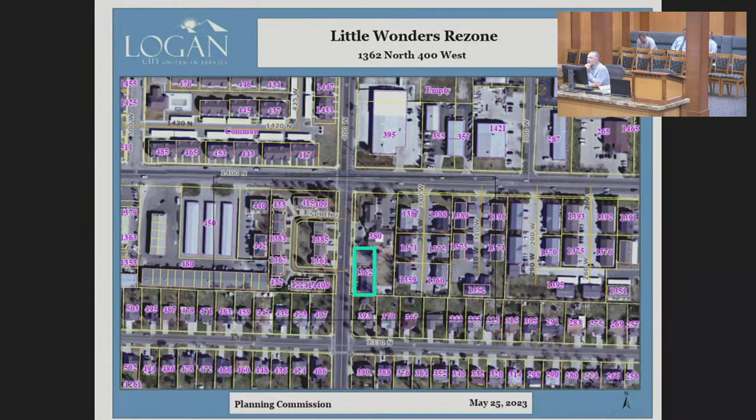And the current zone is residential. As you can see here, it's MR12. Commercial level daycares are not allowed in that residential zone - they're capped at 16 maximum kids, and they would like to house about 30 to 35, I believe. So their request is to rezone that to community commercial, which is the blue color here, to match the zoning of their main building and main campus there.

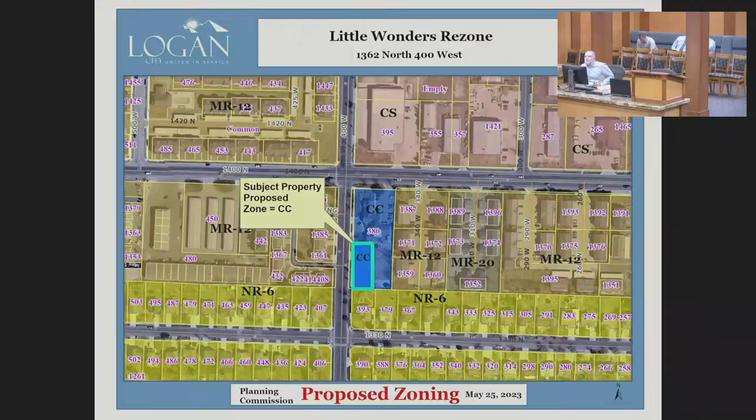Any questions on this one? No. Okay, this is a public hearing. If anyone present would like to come and speak to ordinance 23-19, please come to the microphone, identify yourself, and please limit your comments to 3 minutes.

I will bring it back to the council for action. Before we do that, one quick question: was there any community communication, any emails or anything that came to planning on this? No public comments on this one.

I'll move approval of ordinance 2319. I will second that. Any further discussion? Seeing none, all those in favor of ordinance 23-19 indicate aye. Aye. Aye. Any opposed? Okay, ordinance 23-19 is approved. Thanks, Russ, we'll see you in a little bit.

Okay, we will now move to a public hearing on resolution 23-23. This is a consideration of a proposed resolution establishing a property line adjustment fee schedule. We workshopped this pretty extensively at our last meeting. So, Darren, if you have any information you'd like to share with us or the room before we open it to the public hearing?

The only additional information: I provided the summary of how we calculated the fees. That was provided to council for review. Otherwise, it remains the same. Open to any questions. Any questions from either of you for Darren on this? Thank you for doing that analysis.

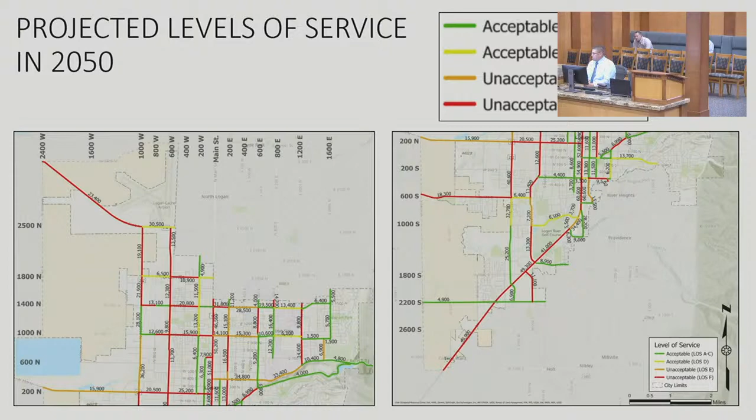We do that through a couple of different processes: having different types of roadways, our classification of roadways, and having different levels of service, identifying our target level of service, which is a D. I've provided a list of comments that were made to the council, as well as one made to the Planning Commission. Through that process, we addressed those comments, at least to what we feel addresses them, and we'd like to leave that up to you to decide whether we addressed them sufficiently or not.

And I guess with that, unless there's more information you'd like to bring forth, I'll leave it up to the council to have that discussion. Any conversation prior to opening the public hearing? Well, I do know that we got an extensive email just before this meeting with some questions and concerns. So let's have the public hearing and then we can talk about it.

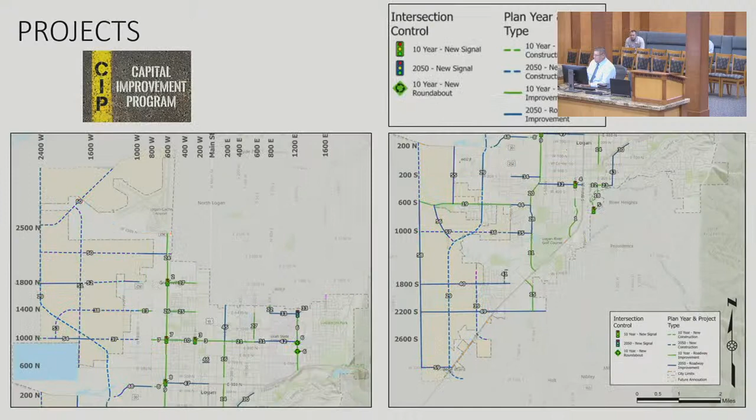I had an extensive conversation with Darren this afternoon and he answered a number of my questions, but I'll make two of them now. The 400 North from 1st West to 6th West is designated in the plan as a future collector street, I think? Yes. Or, it's not an arterial? You're correct, it's a collector street.

That neighborhood has been under threat for quite a number of years with engineering studies. The neighbors there are aware of this, and they're very, very concerned because we have an arterial at 2nd North, and we have Ellis School there. So I think we need to be very careful that we don't dissect this neighborhood any further. I've made pledges to them that I would try to defend them. I think we need to find other ways than to cut another arterial through a good neighborhood. So that's one thing, and I think that needs to go on record.

The other comment came up not too long ago, about the roundabout on 5th North and 2nd East. I love roundabouts and lived with them as I've traveled and lived in foreign countries, but that roundabout doesn't work very well. It backs up, and I don't know the engineering behind it. I think there's an overload on the north-south direction and not so much on the east.

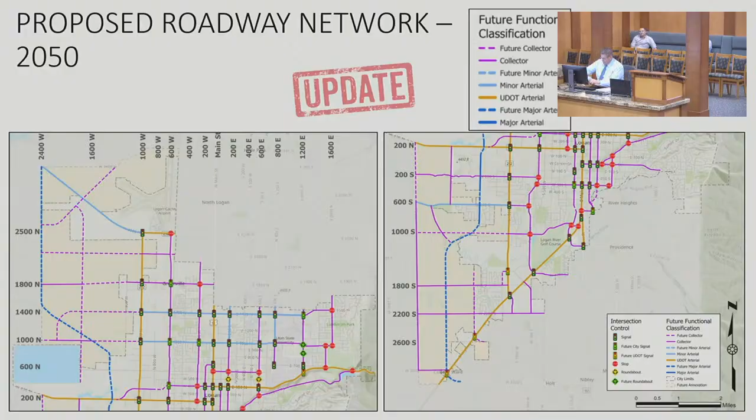Dr. Gail Yost. I live on First East, and I'm part of the Neighborhood Council, Neighborhood Steering Committee. I have two questions. One is about First East. We are getting inundated, and yet just one block north of where I live, we have another building being finished that has 100 and something apartments in it.

And how are we going to, is this going to really be approved? I mean, the problem is, I see your landscape thing saying approved, or it's okay, but it's unacceptable, or it's acceptable. But I don't see how we can handle any more traffic than what we already have.

We only have one lane each way, other than at the traffic light at Third South. And it gets backed up to where we can almost not get out of our driveway almost every time that we need to leave. And this is not just the peak times.

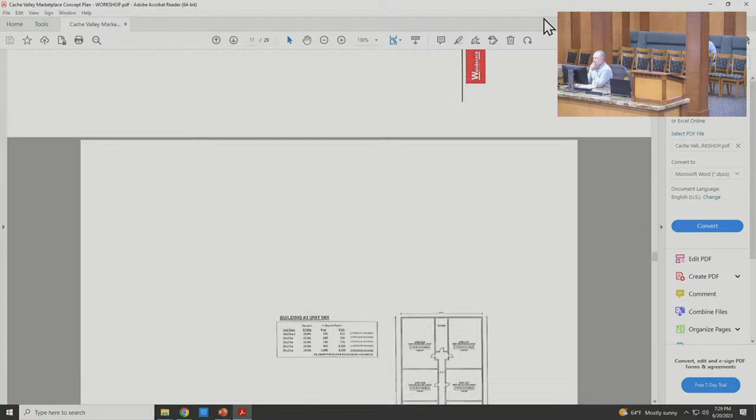But let me... Can I ask a question then? Yes. So then as far as public comment and public ability to render their thoughts and opinions at this concept plan stage, that is not included. It's only when it comes back to planning, when there's an actual action item on it. So there's not, at least the way I understand it, there's not a formal public comment period when it's workshopped as a concept plan.

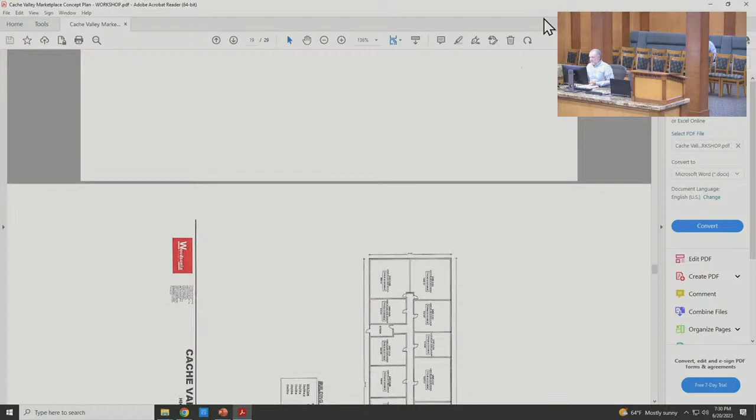That could be, I mean, maybe changed in the future, or maybe there's other ways to receive comment. But once it goes to Planning Commission to start the actual formal project application, then obviously there's comment periods available at that time. See, I do have a question about that.

Because I know that we're workshopping it, so that's why. But if you are creating a concept in partnership with the Planning Commission and the staff to create, quote unquote, a better product in a space that doesn't accommodate it easily with zoning, it doesn't seem prudent for us to not have some way for the public to interact with that process.

Because right now, the Planning Commission can't talk about the project outside of Planning Commission because of their quasi-judicial role. The planning staff is talking about it internally, they present it with the developer. Then everybody hears it all at once, and the Planning Commission and you have had an opportunity to weigh in, but then you have given them the go-ahead for a project plan, and then the public gets to comment.

That seems like it's a little bit not in a good order, because we always tell the public to be a part of the beginning, not when it's built next to you. And we're saying if we're doing this, we're not allowing them to be a part at the beginning. So that's my comment. Yeah, and it is interesting because if they were just going for a regular commercial project, if it fit the zone, then there would be no need for the public input except for at the Planning Commission level.

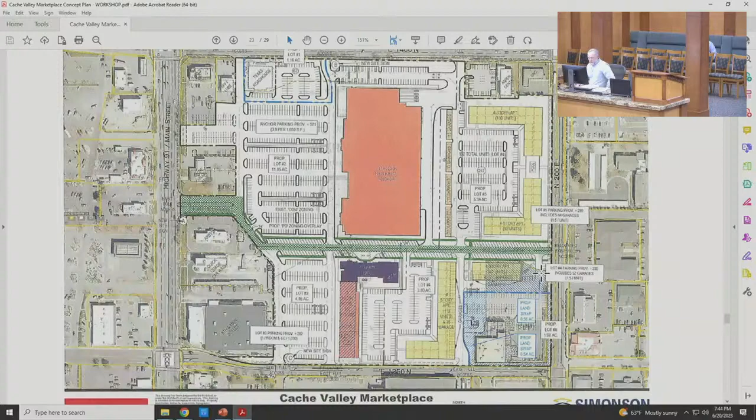Let me go through these. This shows some of the landscaping from a different angle. Sorry, that's a different orientation, it's rotated—north is on the right. I'll just turn my head this way.

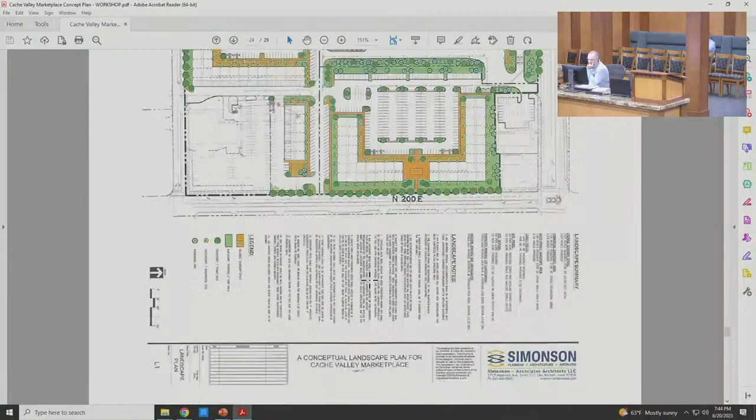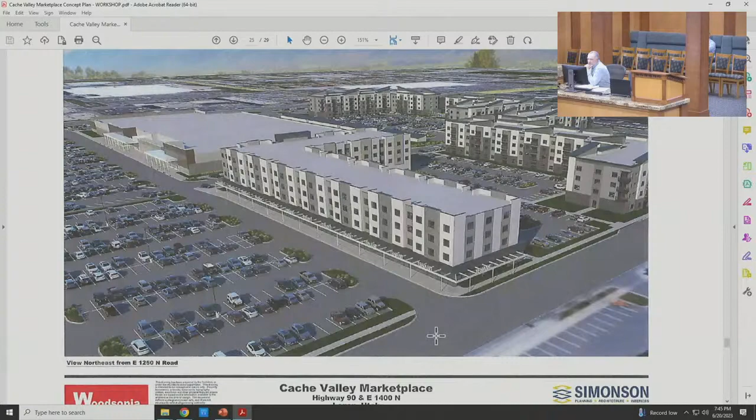The street in the foreground here is 1200 North Street. 1250—can you scroll back to that?

That commercial area with the awning—so if that was a coffee shop, could they have patio seating there? Is it wide enough for little tables and chairs, like if a Dunkin' Donuts wanted a couple outside tables? I think that's the intent of this concept plan. There's some flexibility there. I don't know if it's been detailed, but there's a wide sidewalk that could have some furnishings or other types of things.

This walkway would connect in front of here too. Some of the pedestrian circulation needs to be worked on a little bit—maybe some crosswalks right here. But yeah, that's the idea, that's more storefront.

Do those storefronts go all the way through the building, or are there also storefronts on the east side? It would be one tenant—this would be the front, and that would be the back. On the back side there may be a loading door, receiving. It could be restaurants, retail, things of that nature in this area.

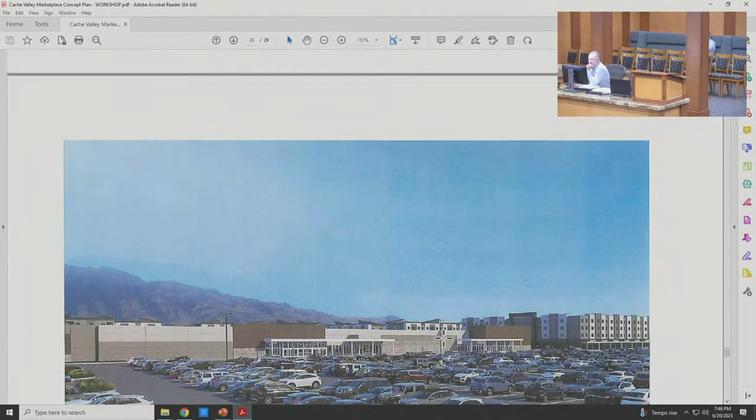This is looking straight on to the big box. By the way, Kurt just gave me this—the mall is about 300,000 square feet right now. This would be... 150 for the big box plus an additional 20, so you're about 170, compared to 300 for the mall.

This is looking basically straight east at the front of the big box here. The hotel's over here—you can see the lobby entrance to the hotel. And in the background you see those apartment buildings.

So from a taxable standpoint, the hotel is a commercial business, and you'd be receiving tax revenue from that, not too dissimilar from a store, correct? It's a bit different—the hotel does generate tax revenue, property tax as well as room tax, whereas residential is reduced by 45%.

Is the hotel square footage included in the commercial square footage? No—that 20,000 square feet is just the bottom first floor storefronts. So you've probably got 20,000 times 4 at least for the hotel floors above. In terms of square footage, commercial space—you'd multiply the 20,000 by 4, so you've got 80,000, plus the 150,000, so you're close to the square footage of the mall overall.

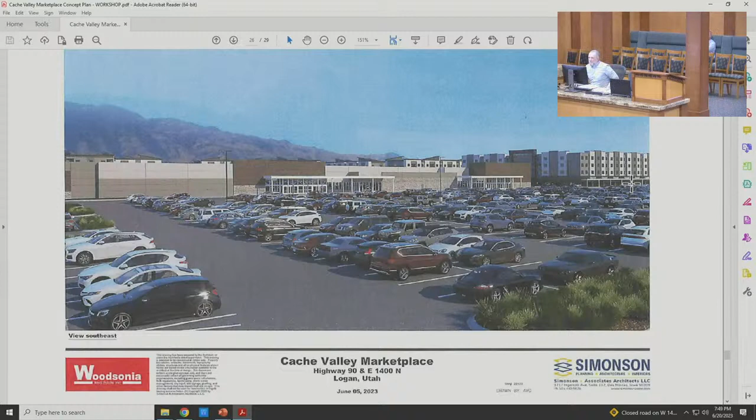Correct, yes. I'm just wondering if my thinking is off—everybody's staring at me kind of blankly. I'm thinking it's really more commercial space than the 170. There are 156 rooms. I'm not sure what an average room size would be, but they're about 400 square feet this way, and then this way, so it's even a little bit more.

Just some more images here, to give you an idea of scale and mass.

Top left is again from above Home Depot. This is looking directly off of 2nd East, so they have a pool here. It's hard to see, but this would be the back of the big box right behind there. This shows the front of the hotel a little bit better. So this is that kind of interior street as well.

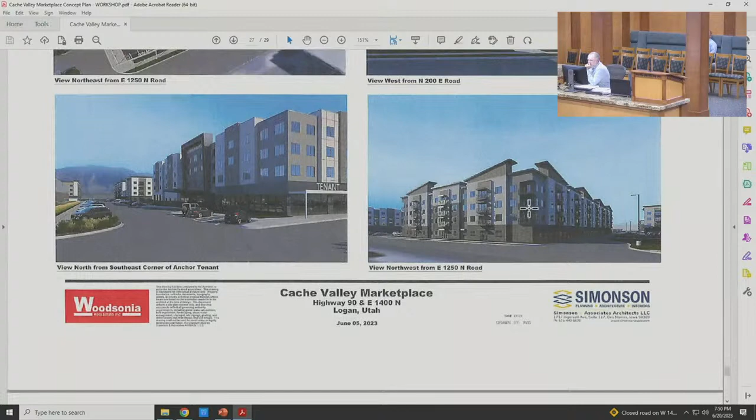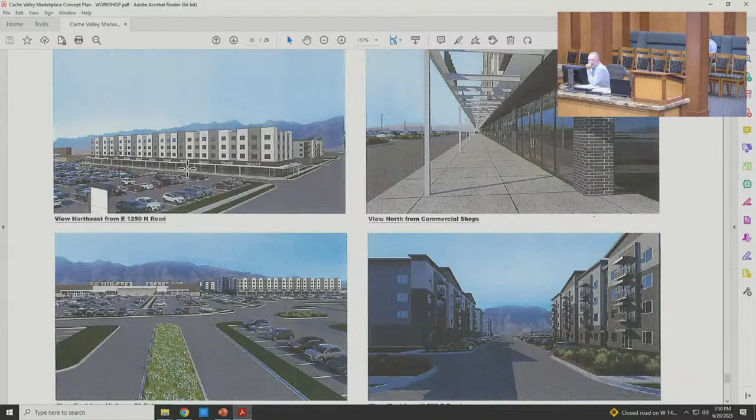Again, not a ton of detail at this point, just kind of give you some ideas. And then this shows the residential, kind of a unique parapet design there. This shows those storefronts a little bit better, so you get an idea. Probably 12 to 15 feet of sidewalk width there, with the canopy overhead. This shows it from a little more straight on.

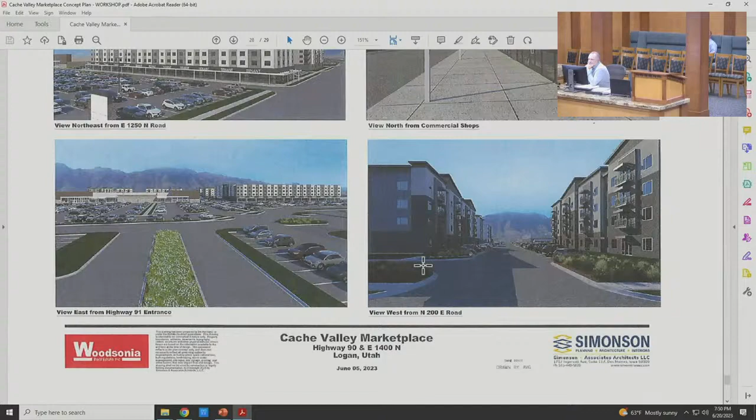This one would be looking at the existing mall entrance, looking directly into the project from Main Street. More of the residential.

This is a proposed sign amendment. Let me go over the changes that they would like to request, and it's part of this exhibit that was in the packet.

For starters, they would like a parking lot interior landscaping variance that doesn't require the 36 square feet of interior landscaping when you have parking lots that exceed the base requirement of 125%. The idea around that code is the bigger the parking lot gets, the more landscaping we feel like it needs to offset the visual impacts of that amount of asphalt, but also the environmental impacts. Shade trees and things like that are good.

They're requesting that it just stay the standard 18 square feet, which is typical for most projects that you see built recently. This is a standard that was adopted about 7 or 8 years ago, so newer projects will have that parking lot landscaping. And it doesn't have to be islands right in the middle.

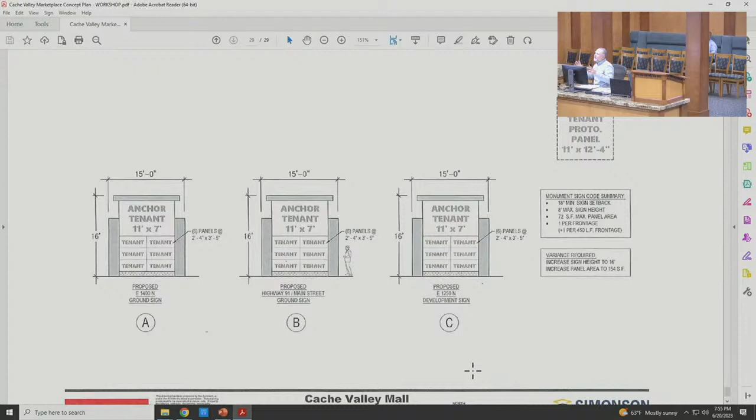Well, the way the code reads is you get 1 sign per street, plus 1 extra sign for every 450. Since they actually have 4 streets, they would be given 4 signs, plus they have frontage. So the project would allow up to, I think by right today, more than 6 signs, but at a smaller size. Yeah, it's not the quantity that's the issue, it's the size that they're requesting.

So they're requesting 3 instead of 6, but bigger signs than what they would be allowed under our current code, is what I'm hearing. Well, actually, let me go back, because I think it's 4, and I apologize, I should know that. But let's see, so it's 1, 2, 3.

Oh, you're right, 3. Well, I will say, having been behind people where they don't see a sign until it's right on top of them and they slam their brakes on because they're like, oh crap, that's where I wanted to turn - sometimes signage is not necessarily a bad thing on a busy road. Yes, for wayfinding purposes, I totally agree.

The other one is density, and this one really depends on how it's entitled, because if you look at it as an overall project and the 28 acres, it's well under the mixed use density of 20, or even commercial's 30. If it's entitled and permitted totally separately, where they're saying okay, we're going to carve off the back and permit that totally separately, then it would need the density increase.

To what? They're asking for 50 units per acre. But if you do the calculation of the overall, I think it was about 12 units per acre. So it's MR50 if you just look at the housing footprint of where it is, but it's spread out, it's MR12.

Yeah, but we'll typically do gross density when we do projects like this. We've got a mixed-use project going before the Planning Commission Thursday, and that's going to be a gross density, even though they've got portions. So it's how it's reviewed and permitted.

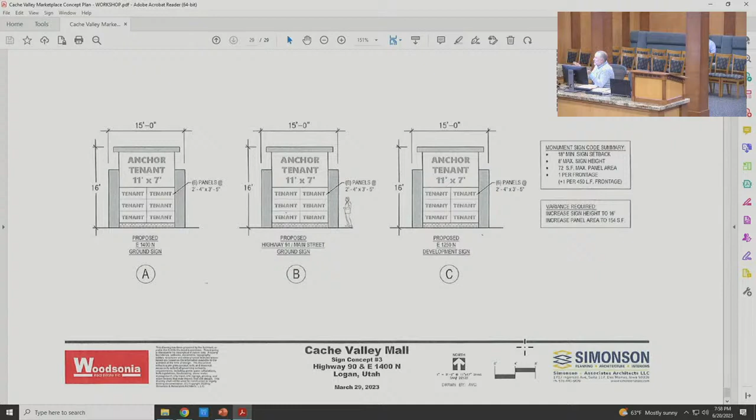So I think that asking for that clustering is unusual, but I don't think it's a big deal. The only fear, I guess, is if the big box came in separately, was permitted totally separately, and then the back part was sold and came in 2 years later totally separate. Then it would be a density issue, but I don't think that's the case. This is going to be one project review and approval.

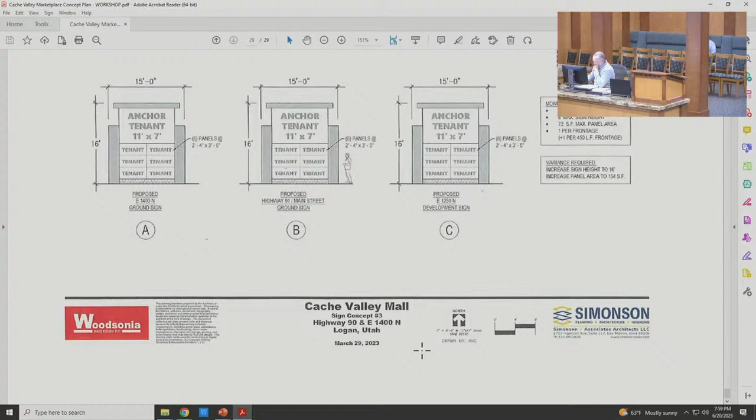But that's the only comment I have on the density. The other one is the ground floor residential for that 200 East, and I talked about that, and some setbacks on the interior, but that shouldn't be a problem again with the project review. So that's the concept plan, kind of in a nutshell. I'm happy to answer any other questions, or if you have feedback.

The applicant is not here tonight, but I do believe they're tuning in, or they can read the minutes. We can get them the feedback that they need.

So what is the difference between what would be required in terms of landscaping in the parking lots and what they are requesting to be able to do in terms of overall acreage? So that goes back to when you propose a project that is 125% bigger parking lot than our code, it triggers that double landscaping.

Right. And our code's pretty geared in a way that it usually doesn't trigger double, but sometimes it does. And the big box, they get really busy on Black Friday and certain other times. They like to park and plan for those certain times. But what you see before you here is pretty much our standard 18 square feet, which means about every 20 stalls, you have the equivalent in an island or one of those corner pockets. Okay, if that kind of helps you visualize it.

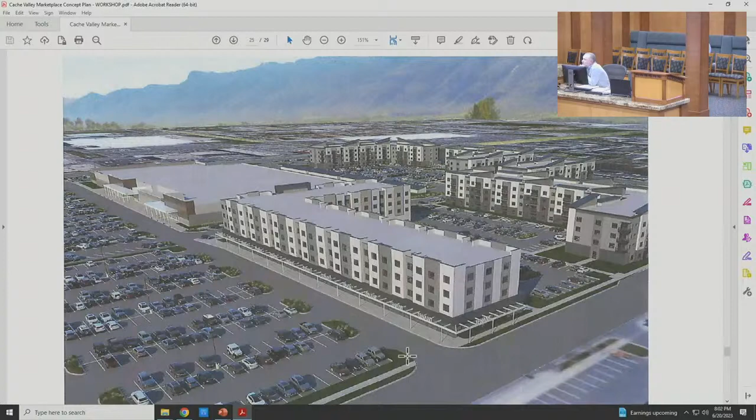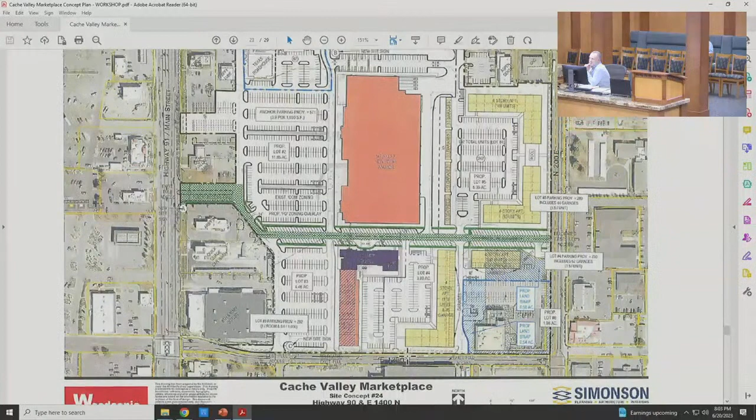We've also discussed the new right-of-way that goes right through the center, that needs to be very pedestrian-friendly and have pedestrian amenities. Tonight we talked about the transportation master plan. You could live in one of these developments and not need a car. As you age in place as senior citizens, you could walk to restaurants, walk to groceries, and there's transit there.

It's a location that's already planned for high traffic counts anyway. As our city redevelops, it's going to need to densify. Is this a location that makes sense? And again, through this planned unit overlay, do you get the project you want by allowing some things that make sense to make it a better project?

Having recently lived in a townhome development here in our beautiful city, I had this much green space in front of my place, and the back was a driveway. There was a reason we chose to live there, for location, size, and proximity to where we worked, so we did not have a gigantic green space near us. People make choices based on a wide variety of things, but green space may be one of them for some people.

I'm assuming the housing would really be held to our same general zoning standards in terms of usable open space, or that would at least be a starting place for discussion. You look at that base zone, like the mixed use, and it says 20% of your site needs to be landscaped or converted to some sort of usable outdoor space, and their pool and other amenities like that would count towards that. They're not asking for a variance in that part of it.

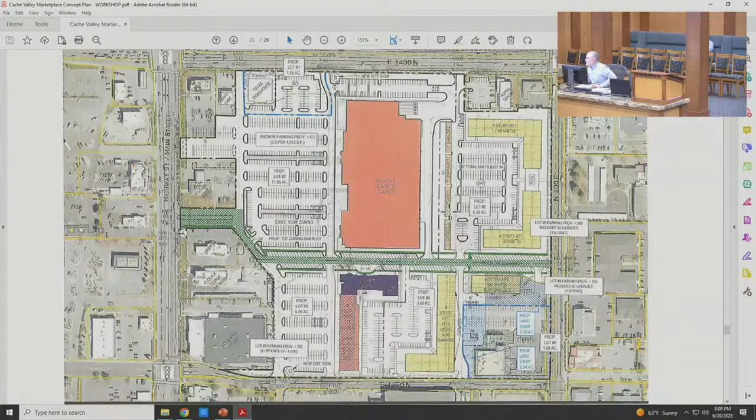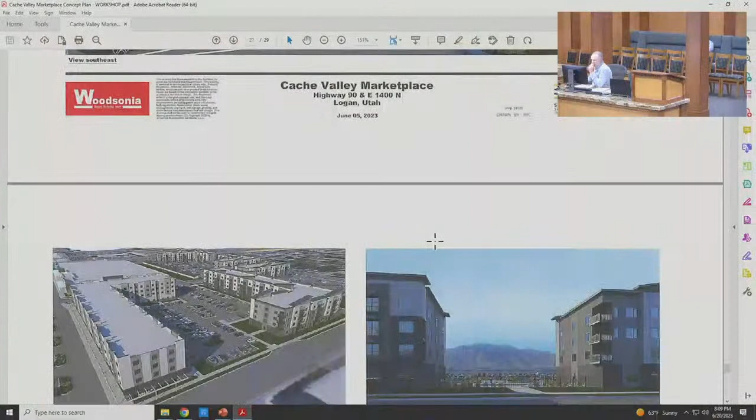Second question: is there structured parking for the housing? No, there's enclosed garages, but they're not multi-story, essentially a carport with walls. There's an image if you want me to look. Because they bill it as luxury, and people living in luxury are concerned for their safety, so if they have to walk 200 feet through a parking lot, it's not safe. Sorry, let me take that back, because there are a couple of interior garages on some of these facades.

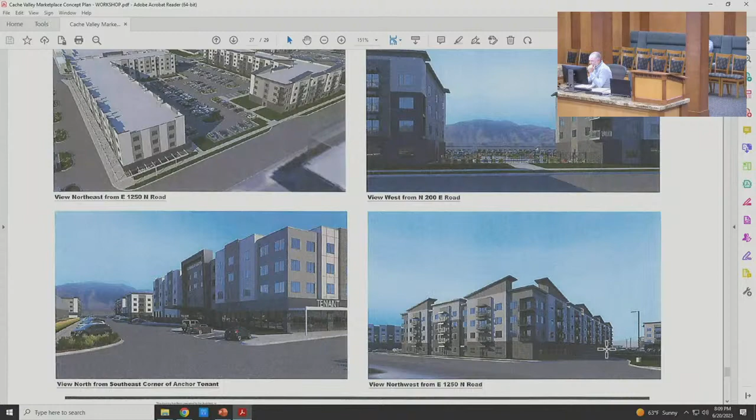So right here there would be a single row of garages, but they don't have a picture of that. Some units have a garage here, but not all. So Tom, this wall right here actually has garages that are part of the building footprint, and this wall too, but all of these light brown garages are just standalone. Okay, we don't have to solve it all, just a concern.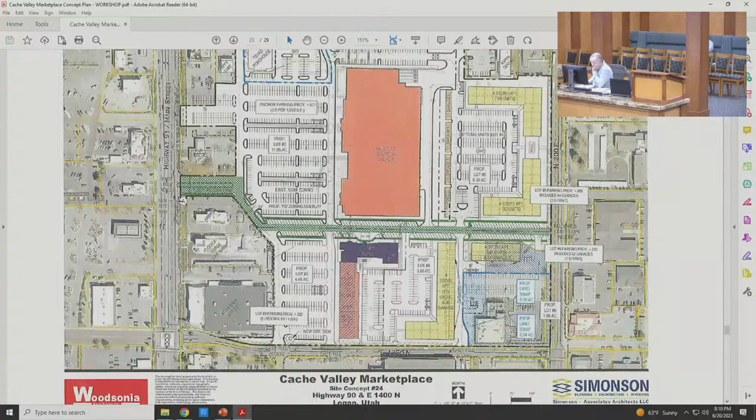It says there's a subdivision, what is it, lots? In the description it's talking about a 6-lot subdivision or something. Where is that? I believe it's 6. So if you follow these interior dash-dot lines, that would be lot number 6. So there's 6 single-family homes on those lots? No, there's no single-family homes, but there's parcels that contain multifamily structures. Not part of this count? So it's not considered 6 different projects?

Right, that goes back to my comment earlier about how we permit and entitle this. So they're saying there's 6 lots, but we can approve a mixed-use project with 6 lots or 10 lots. Well, we did that out on 2nd North and 6th West, because it was developed by different funding mechanisms, which required them to subdivide it. Okay, so we'll come back to that maybe.

Let me do two other quickie things. Bus - I think it needs to be focused so that the bus system can bring people to the door, not drop them off out on the curb and have them walk 400 feet. If the bus system is to work, you've got to get them to the door of the hotel, get them to the door of their housing, or at least to the entry to that section. That's a good point, Tom. Thank you, a really good point. Because it doesn't appear that there's any bus infrastructure allowed within what they spec'd.

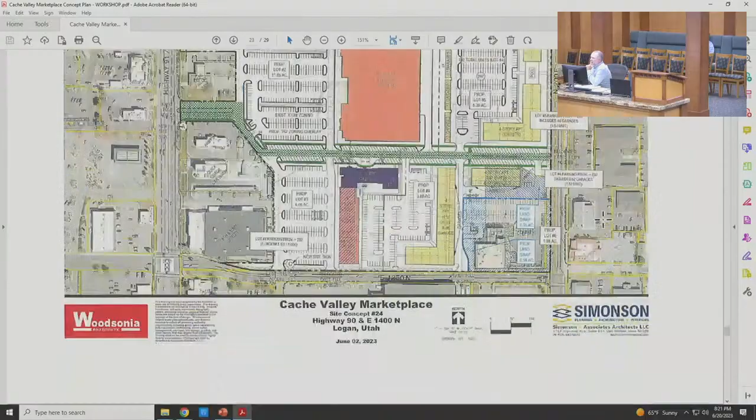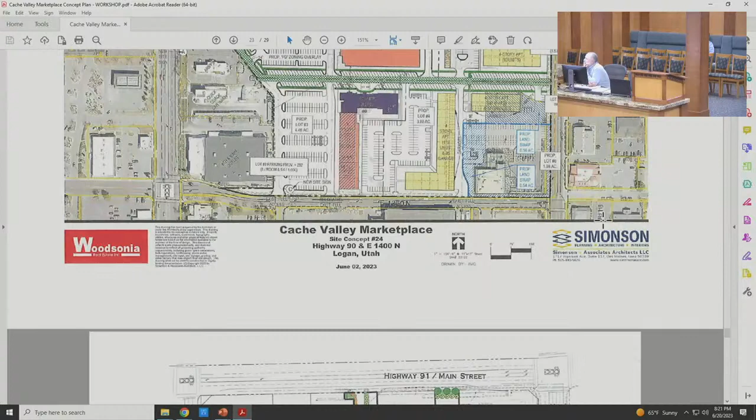And are the signs podium signs or monument signs? What's your definition of podium? Podium is like monument signs - they're not a pole sign, they sit on the ground like a monument, it would be a monument sign, but it's just taller. It's pretty darn tall.

If there were wiggle room in that, I would like to see them not quite so tall. Well, they're requesting - I know, but I said if there's wiggle room, you don't have to grant the request. Once you say it's almost 2 stories tall, I was like, oh wow, that is tall. 16 feet doesn't sound as tall as 2 stories. I mean, 3 stories without the roof. Right, I know, but still.

I think this will be helpful feedback for them. They're going to make a decision, and they'll know what they're up against when they come back for a formal project review and approval. So we'd like a nice project.

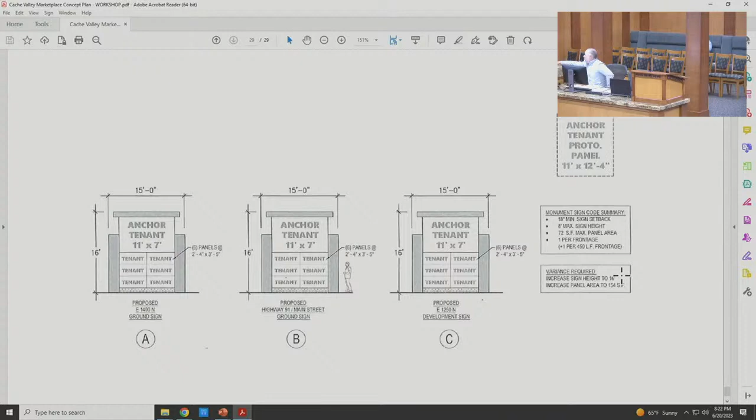Can you elaborate? I was there, but I don't really remember. Did the Planning Commission have any specific feedback you could share with us? Not too specific - they shared some concerns about the green space, the walkability, that kind of sense of place. This is a big enough project site where you could create something meaningful - you could do a 2-acre courtyard there and still have 4 acres for your parking lot landscaping, so I think there's room to operate just because of the mass size of the project site.

And you won't get a chance to do this twice. Right, well, I think the Planning Commission was really excited about redeveloping the mall.

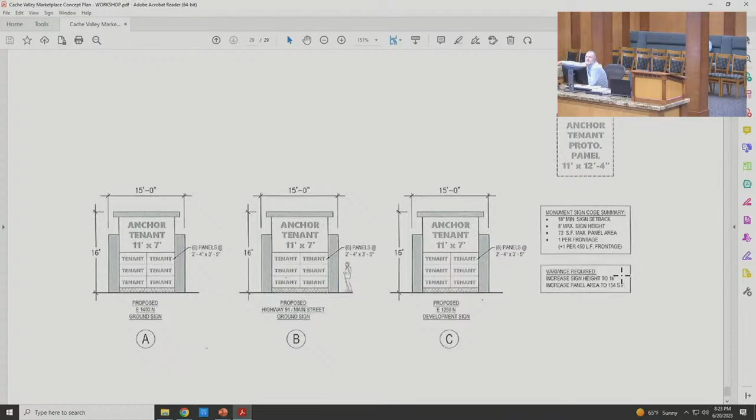It's obsolete, but if we're going to do it, let's try to do it as well as we can. I'm thinking about the comment on Black Friday and easy bus access - if Logan City sets up a park and ride for shopping on Black Friday, people could take the bus right up and back, alleviating pressure. They could go to Home Depot, the big box stores, 8th and Main, without having to drive. It might help alleviate the need for a massive parking lot for just two weeks out of the year, like how we try to get people to take the bus to Summerfest instead of parking. Otherwise they'll just end up parking on my street during Black Friday and the grand opening.

Any other questions for me? Nope, I think that wraps up what I was going to show you.

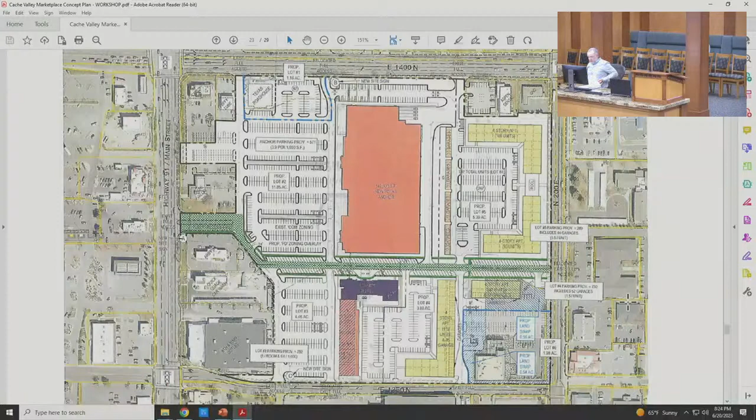The PD overlay ordinance is going to come to us end of July, early August. Best case scenario, the Planning Commission reviews it Thursday, but they may continue it - I don't know what they're going to do, but that will be how we structure this process. If we need to make tweaks as far as comments, times, things like that, that's when we'll change those.

Can you pass on our comments about public input to them? I will, thank you. Are you going to do that? Yeah, okay.

One of my favorite meetings, along with this one - if you can have a favorite meeting.

Any other comments for Russ? Okay, our last workshop is Darren.

Hey Darren, you look so different - much improved. I met your nephew, I kept saying I know your dad, and finally he's like, no, you don't know my dad, that's my uncle. But he did say you were the fun uncle. So this is ordinance 23-20, a vacation of public utility easements along Crayon Court - never heard of that street, haven't either, in all the time I've lived here - and Southwest Street. Well, as you said, I'm not Darren, but I'll do my best. I'm the other Darren - we'll tag team some of these. It's Daryl and Daryl. Now we need Darren and Darren.

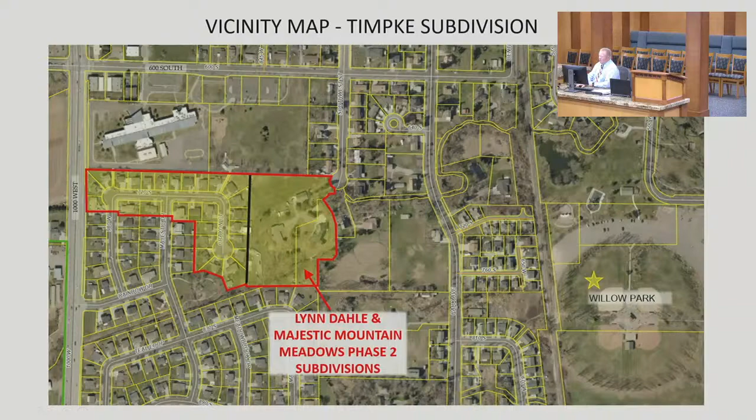Lynn Dahle seems to be a single building - it's mostly just these two lots, that's all it is. Moving in a little bit, on the back side of 95 Crayon Court there's an existing public utility easement that was recorded there, and on the back side of 701 Southwest Street there's another public utility easement.

The owner of this lot has, with the county, done what we refer to as an illegal subdivision, because it was done with the county only and not the city. They created a singular lot that follows this fence line right here without going through the city's subdivision process. When did this happen - did someone sell property to them?

I don't know, a while ago. So it was a while ago. In full disclosure, the subdivision process with the city, as I understand it, happened years ago and was approved, but one of the conditional comments was that you have to go through the public utility easement vacation before this can be recorded. They submitted for it - I don't know the full story, but it never happened. So we're trying to clean that up now, it's called a backlog of work.

So what happens to the lot that they created - the one that the county says is there, and we don't say is there?

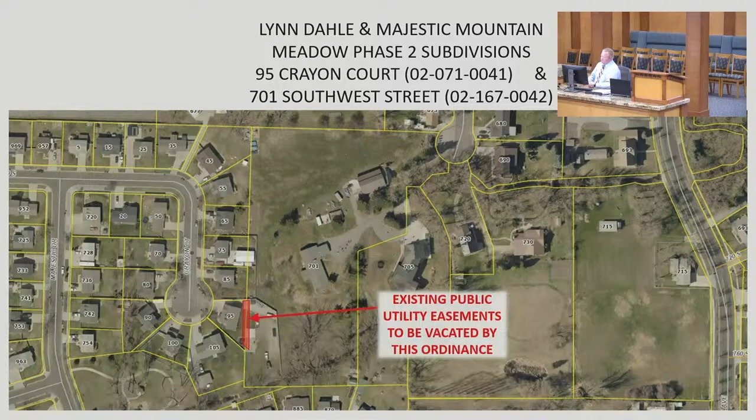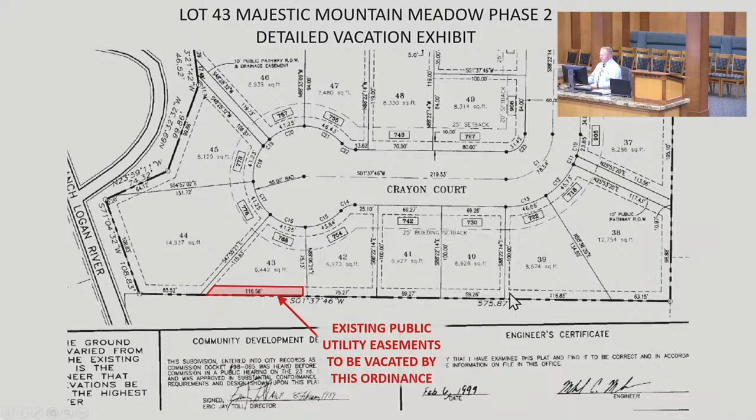Let me go forward again, we reoriented. This is that 95 Crayon Court. There's the public easement that existed around the perimeter of the entire subdivision. But on this one, it existed right there, 10 feet on either side. A little bit unique - today we do 5 feet on either side for a total of 10. When these were done, it was 10 feet. So where's Herm when we need him? Because there's actually a value to this. So yeah, there's some other answer to that.

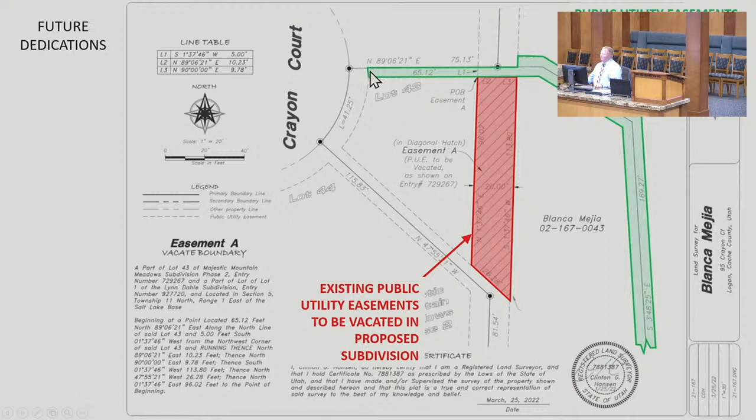Here's where we are, 95 Crayon Court - oh, I forgot the number - 701 Southwest Street on this side. This is what we would be vacating to make that whole, if you will, if that were ever needed. As proposed with the subdivision, was a new public utility easement that would get you from here and around the new lot line - well, we can't put it around the lot line if the lot line doesn't exist, according to our rules. But when the subdivision process happens with the city, they would be required to have this public utility easement.

Oh, so two separate processes. Today it doesn't happen - it's not there today, except for the green part. Would be added - the green part would be added today that goes from the cul-de-sac to the end of the red. Correct. And the rest of it doesn't happen until they come and say, oh, by the way - no, the green part would happen with that subdivision process. It would be part of that plat amendment.

So we would vacate our stuff before they do the subdivision? It's the chicken and the egg, right? Yes. If they came in with the vacation first, we'd say, well, how are you going to make up for this? Oh, I'm going to do a subdivision. Okay. If they come in with a subdivision and say you need to vacate the easement - they somewhat typically happen simultaneously, and we just don't record either one until they're both approved and ready.

Again, this one's a little unique in the fact that it happened, I think, about 2 years ago, the subdivision. We didn't record it because one of the conditions was you need to vacate these easements. They, as I understand, came in with the information to start the vacation process, and it never happened. I don't know if that means our staff never did it. But are all the rest - a COVID failure? I would blame it as a COVID failure. But here we are.

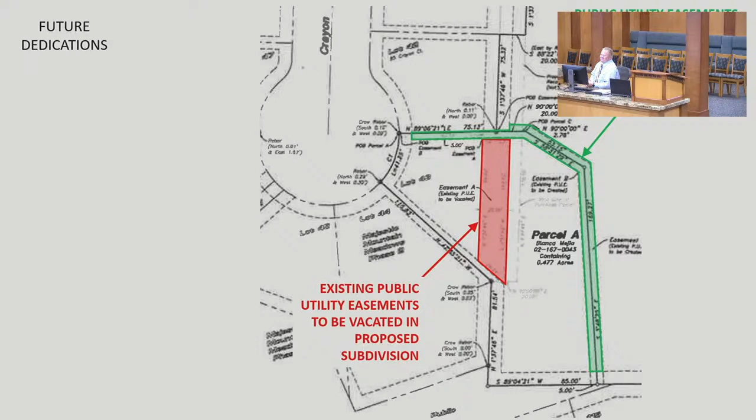Sure, okay. This was a really interesting workshop. Does anyone have any other questions for Darren? I'm just, yeah, I guess it is odd, where it's two separate processes and they truly rely on each other, because we condition one to be done and say you can't complete it till you do this one, but they both have to be done for either one to be.

So they get 20 feet and give up 5. Square footage wise, my guess is they're dedicating more than we're vacating. If you look at overall square footage, I haven't measured it, but looking at it, they give up - but we're giving up 20 right smack in the middle of what they want to do.

When you think about it, a utility needs access. Does this cost them more if they have to wrap around? Is there additional cost for the utility if they have to invoke these routes? It probably depends on what they're doing. If they're strictly trying to get from one point to another, yeah, it would be a longer route, but there's no reason for a utility to go strictly point to point. They're typically trying to get from one street to another, or from a street to a property, so I don't see that as an issue.

We have sent letters to all the dry utilities asking if anybody is located here, and there's none that we know of. These also have to be publicly noticed within the 300 foot radius and all that, which we typically do between the workshop and the action item. So if any neighbors have an issue, we'll hear about it. Correct, if a utility or a neighbor makes an opposing comment, we'll have that for the action item. Hopefully they're good neighbors and that won't happen. A typical reason for this, I can't say exactly what the applicant wants to do, but...